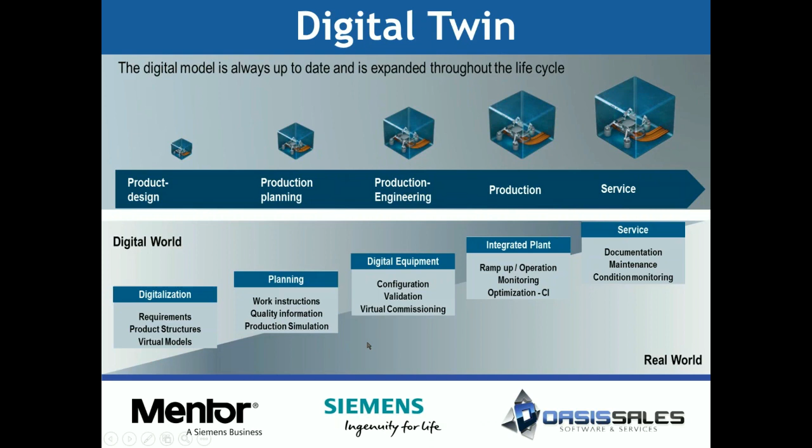So let's move on to the main topic of today, and that is MCAD Collaboration. So really, what is it? It's just the ability to push and pull data between your mechanical engineering tools that your mechanical engineers might be using and the PCB layout tools that you're using. Now, we may have some mechanical engineers and some electrical online. Hopefully we have both, so both of them get a little bit of flavor of what we're talking about here.

But it's a much better or more streamlined way of moving data between the two applications, because now you don't have to deal with the old methods that we've all dealt with over the years, either DXF files, which just come in as dumb drawings. Then you have to kind of copy or replicate what's on that DXF. IDF was a big step forward, where you could at least start bringing in some intelligent data from an MCAD environment. Most MCAD tools out there do support outputting IDF data.

And then STEP started to come into play. More and more tools started supporting the STEP modeling capability, which PADS started doing several years ago as well, for generating a three-dimensional realistic view of the board that you could bring into mechanical. Now you could start doing a little bit of clearance checking with that as well. And then, of course, there were paper drawings. But the collaboration continues to go a step further.

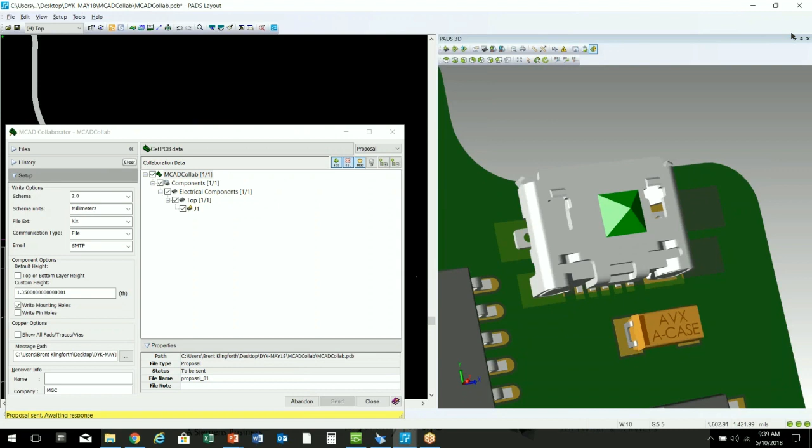So let's go ahead and take a look at what the tools actually look like. So I'm gonna go ahead and open up PADS here. So hopefully we've all seen PADS and its ability to do the 3D stuff. That's what I'm showing here. This is a simple board design that I put together, and I've placed the components. And then over here in our 3D view inside of PADS, I'm able to view the board with real 3D geometry. I've even imported, oops, I didn't want to do that. Let me go ahead and close that again.

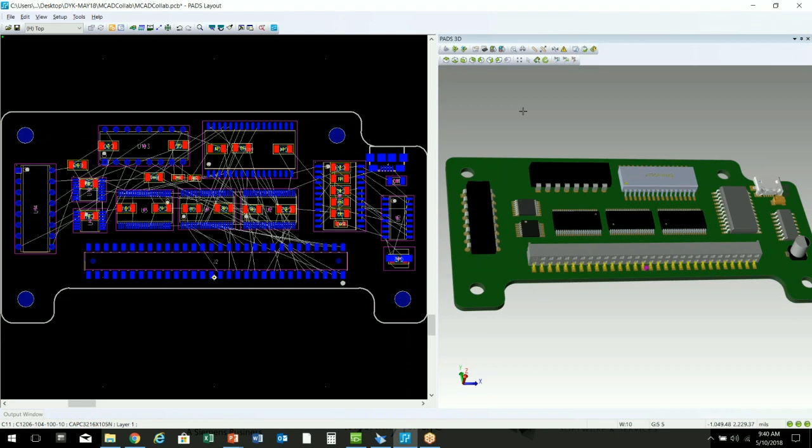I've even imported a mechanical enclosure that I created for this design, and you can place that inside of your ECAD tool like PADS, and then play around. And first of all, you have DRC capability. So if I go up here to DRCs, I can actually create three-dimensional DRCs against particular component classes or just anything in the design and do actual DRC checking in 3D space. This type of stuff most MCAD tools can't do, so it's actually kind of nice when you're really getting into tight design that you take advantage of the PADS functionality to do three-dimensional viewing and DRC checking.

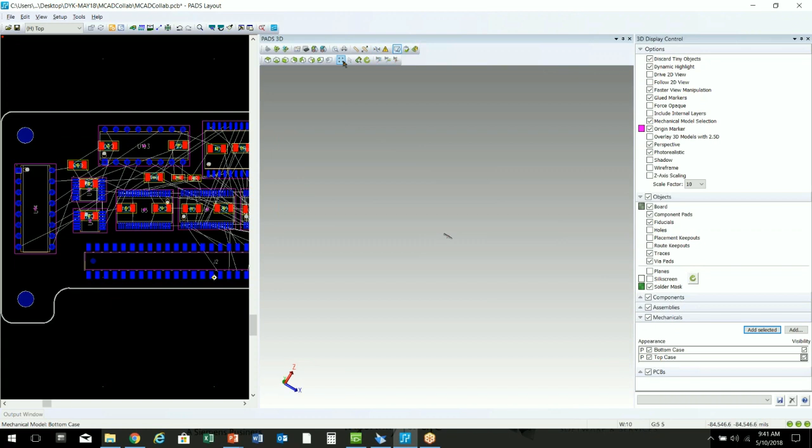By the way, the DRC functionality is currently only available in PADS Standard Plus. If you're using PADS Standard, you still have the capability of importing 3D models of components and enclosures. You just can't use the DRC function to do any verification for you. So again, hopefully everyone's taking advantage of this technology in the tool.

I'm going to take a moment here just to show you some new technology that was added in version 2.3, and that is how you can go about assigning models to parts. I go ahead and select the part here in the layout and then do edit decal. This will take me into the decal editor. And you'll see these big green arrows are popping up now on my screen that weren't there previously in versions earlier than 2.3. The big enhancement here is the ability to just click on an arrow and have it automatically rotate the item for you in any direction. You don't have to manipulate it yourself.

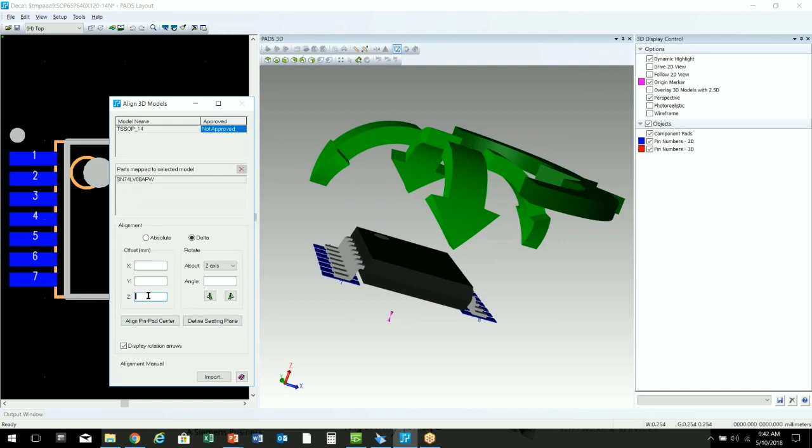And then these two buttons here have been added to the tool. So if I was to select this component and move it up in the Z direction, say 50,000. Oh, that was a little bit too high maybe. Just go up 1 millimeter. There we go. Much better. All right, so instead of me having to worry about figuring out what the right number is to mate that item, I can do define seating plane.

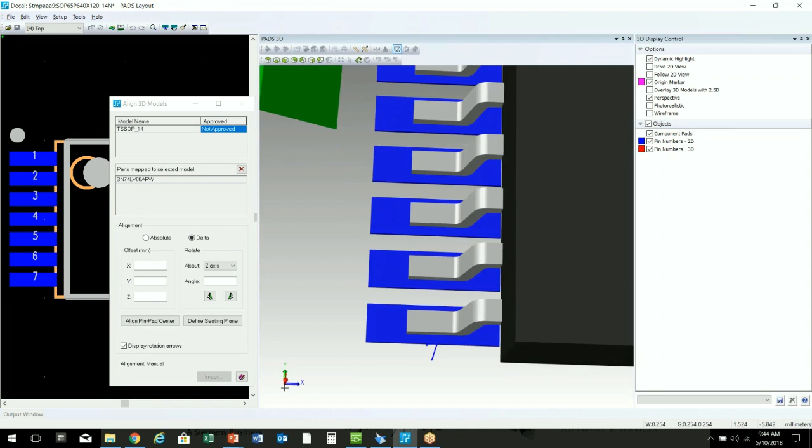Then I can pick the bottom of the pin and it will automatically snap to the top geometry of the pad. And then there's also a center alignment function where I can select the pin and it will automatically snap to the center of the pads. So no more having to manipulate numbers to align parts in the decal editor or rotate and such. It's very quick and simple to do that now.

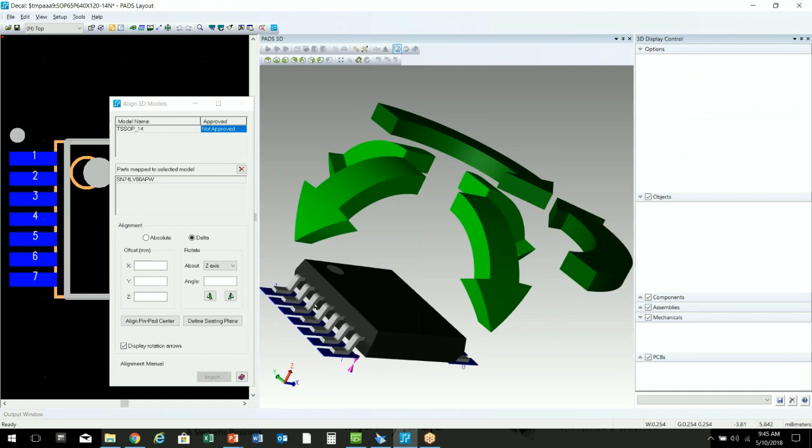So then anytime you've made modifications to a model assignment or you've added a model assignment, the tool is going to ask you to update your design. I'm going to go ahead and cancel in this case.

And if you're using integrated flow, you can actually store all your 3D library content off into your library by coming up here and going update library. And any new parts that have models assigned to them, you can now send those off to your central library so that every time a new design comes in, you can update it very quickly and not have to go through each unique component and merge items. So just an FYI on that one, so everyone knows you have that capability.

Now let's get into the collaboration side of this a little bit. So in VX 2.3, everyone now has a license of the collaboration tool. Up until this version, this was a pay-for option. That is no longer the case. If you are a collaboration customer, just know that when your support comes around, you can go ahead and drop that off support because it's now included with your PADS Standard or Standard Plus or Pro licensing.

All right. To activate the collaboration function, you come up here. You have to be in the 3D view to do this, and it's the very last button here on the top toolbar. You go ahead and click that, and it opens up the collaboration dialog box. Go ahead and maximize this a little bit here so you can see a little better. There's a couple different sections here.

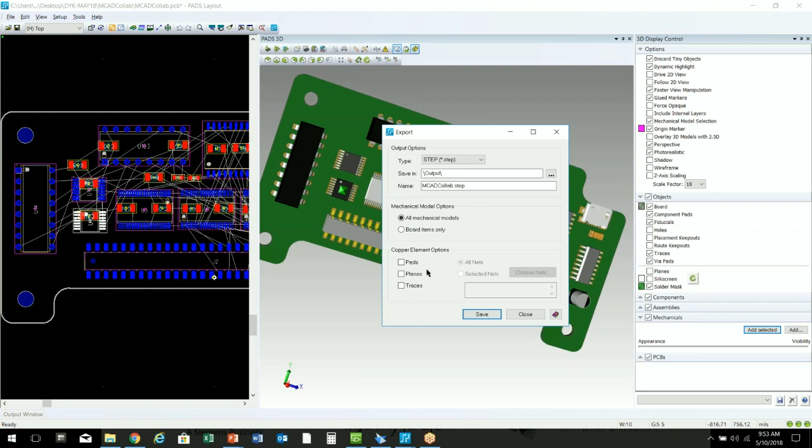So this is also a great feature for you: if a mechanical engineer wants to generate any pretty documentation for whatever reason, you can send them a step model of the board so they can generate that type of documentation out of their tool.

All right, back to the MCAD environment here, or the collaborator. So again, down here at the bottom, you need to specify a file path of where you want all of your file-based sharing to go, okay? And then anytime you generate a proposal or a baseline design and you send it over, it will go into that location. You can add information about yourself in here if you want as well. If you happen to be working with someone outside the company, that might be kind of nice to have. But that option is there as well, all right?

So typically how the collaboration starts between the two environments is the mechanical engineer is going to create the board outline and place some parts, put mounting holes in, and he's going to do what's called a baseline design output. So he'll choose that in his tool as well. It'll gather all the information that he has on the board and any electrical based components, he can put some notes in on what his base design is like, and then, let me go ahead and abandon the change here that I was working on.

He can go and send out that IDX information. So this will generate the output data that they can then bring into their MCAD environment. All right. In this case, mine's going to my collaboration folder here. And you'll see there's the one that I just created. It is rather large because it's including every single part, location, and information in the design.

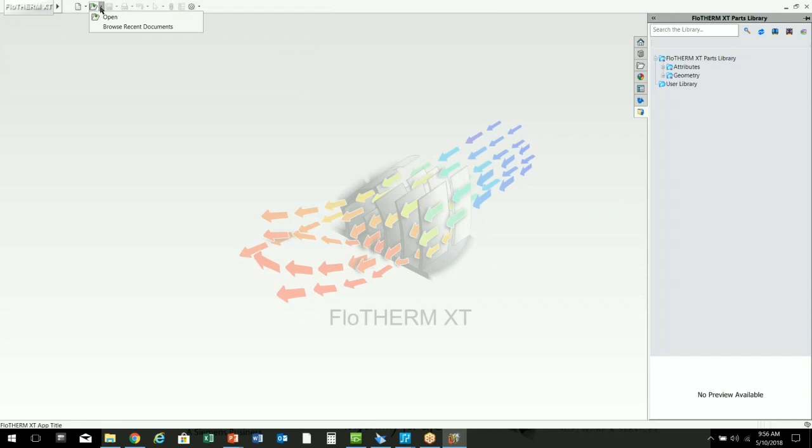Okay. And now if I go over to using FloTHERM XT in this case, which is based on the SolidWorks engine, and it includes the collaboration functionality in there as well. So I can come up here to open. Actually, let's just start an assembly real quick.

And then we'll go to the CircuitWorks interface, that item that pops up, and we'll do open an ECAD file. And I'll go choose that IDX file that I just created, hit open. This will pull the data into the CircuitWorks interface for SolidWorks. Okay.

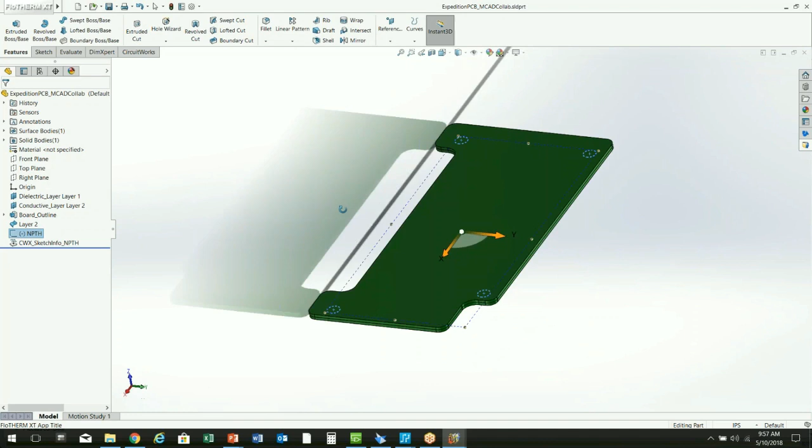And then from there, you can generate the board outline information. So if I right click over board outline here, I can say build a model based on what I have brought over or pushed over to MCAD. This will generate that board outline model. There it is. So there's the exact board outline that I just was showing you in PADS Layout, with mounting hole information.

All right, and then after that, you can go ahead and push over. I'm not going to go through the process of doing this because it takes a little bit of time, but you can go ahead and build a model of the entire board. So it'll take all the parts and everything and push that over as well.

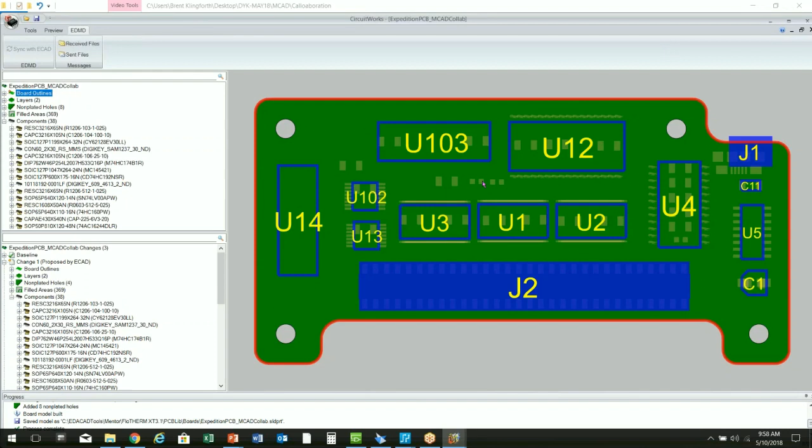So now what the mechanical engineer can do is he can go move an item or change the board outline, move a mounting hole, add a mounting hole, move a component, add components, and then he can come back to the EDMD tab and do a sync with ECAD. And what that will do is that will then generate an IDX file from the MCAD environment that can now be imported into the ECAD environment.

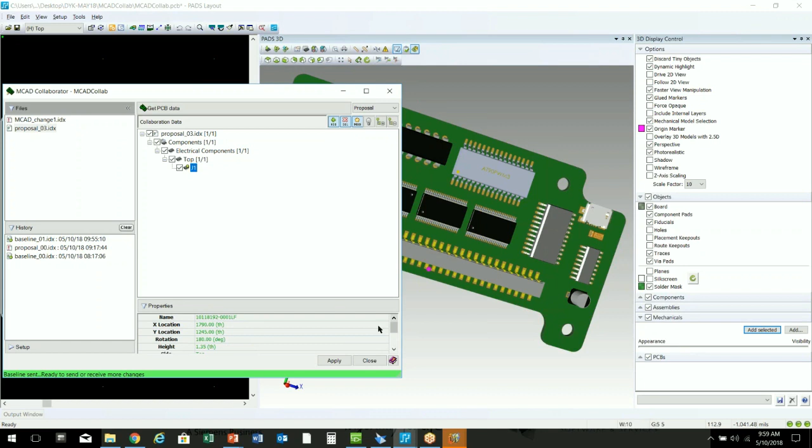So I just happen to have one that I will just copy into the collaboration folder. And if we go back to our collaboration tool, you'll see it instantly showed up that there is a change pending. When I clicked on it, it shows me that, oh, J1 moved. And if I clicked on J1, I can come down here into the properties section and I can see where the dimensions are for it.

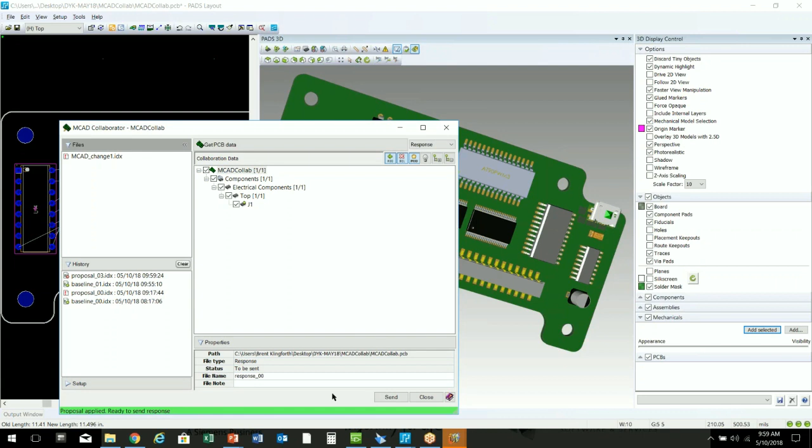And then, like I said, you can apply that change to your design, and you'll see that connector right there just jumped over into a better location than I placed it based on the mechanical enclosure that this is going into. All right. Now, from that point, I can continue to make an adjustment if need be. So if I minimize that a little bit and I go look at where they ended up moving it to. That one actually looks pretty good.

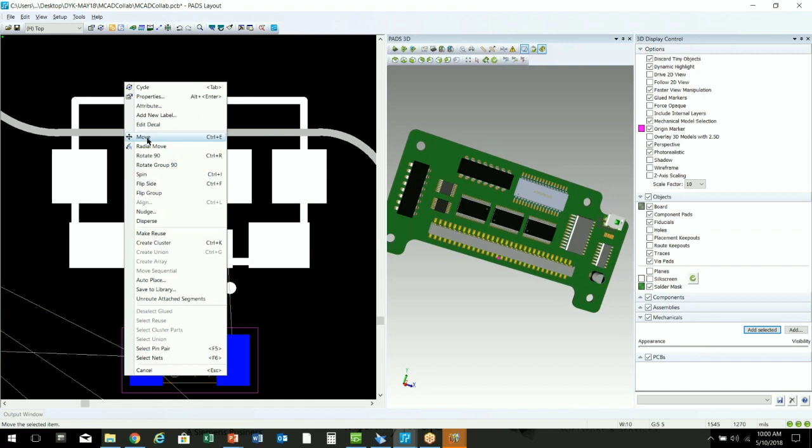I should have used a different one that was a little bit closer to the board edge, but if they ended up pushing it too far forward, not knowing that there were copper pads here, I could then make an adjustment to this part. Well, let's just do this. Let's go to properties here, and I could move this part back a little bit further. Let's go to 35, bump it back a little bit.

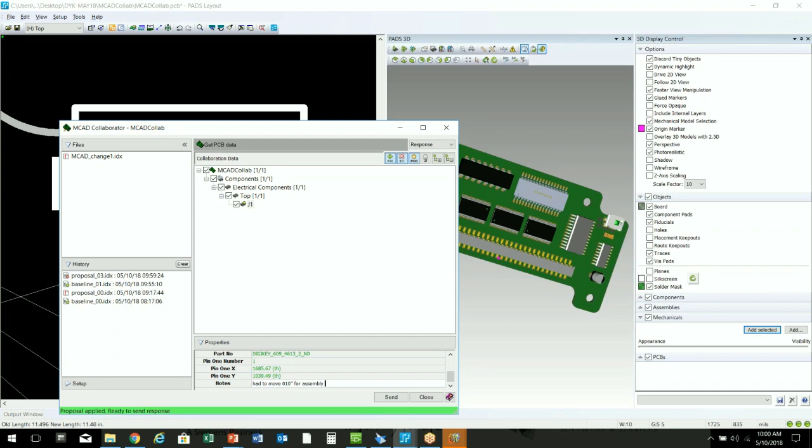Now I can go into my collaboration tool again, get data. It will now have an update in here for the new location information that I sent, and I can say, you know, had to move 0.01 inch for assembly reasons or something. All right, and then I can send that off. And now that ends up down here in the history.

And if I go back over to my MCAD tool, you'll see if the mechanical engineer was still up in CircuitWorks, it will let them know, oh, you have a pending change that just occurred. Let's go ahead and pull that in. And then I could do that change and see if I want to accept that update, or if I want to make another suggestion, or then we can hash it out a little bit more as to maybe we should make the board a little wider, or choose a different connector to make it work for our needs.

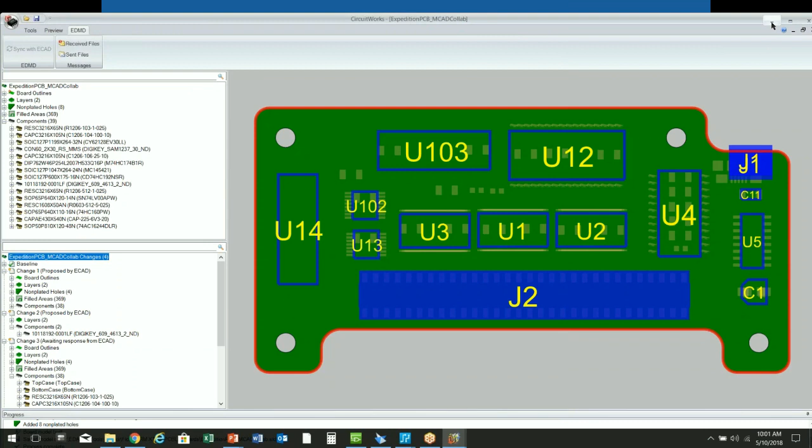So that's the basics of collaboration. The big thing here, hopefully, that you've seen is that you're moving data back and forth between the MCAD environment using electronic information. You're not having to worry about dimensions, go type in dimensions and where to put stuff. It's all done electronically with a couple of clicks of a button in the cool tools that you're used to using.